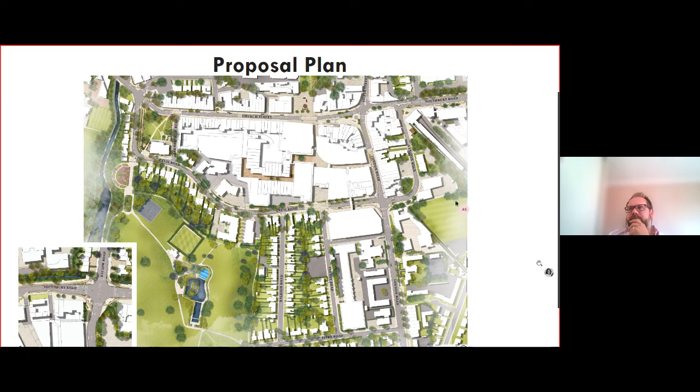Thanks, Alex. As Alex leads the journey throughout the town, I'll be talking through each of the key spaces in turn: Station Plaza, Library Green, a small pocket park off Church Street, the Market Square, and finally Fountain Island. But I'll talk about each of those in turn.

Okay, starting at the top right, we've got Enfield Town Station, and running westbound we're pedestrianising Coleman Parade. Currently there's a service road through here; we're making wider footways, introducing planting, and putting in a safe route for cycling. The businesses need to load, so we've introduced a loading bay in front of the bus stop, and some loading bays through the town centre will also support the evening economy. For example, this loading bay will allow 20 minutes of parking in the evenings, so people can pop to a takeaway and pick up a meal.

So there'll be dual purpose bays - loading during the day, and short-term parking in the evening. Moving over to St Andrews Road, access and egress will be blocked, so only emergency vehicles and cyclists can pass through this point, but it will still allow access into the new Riverloop car park.

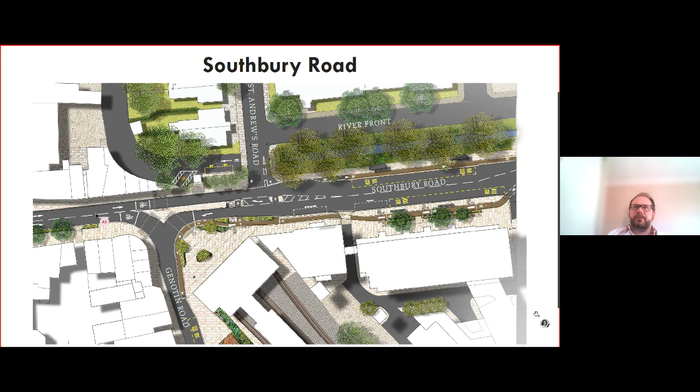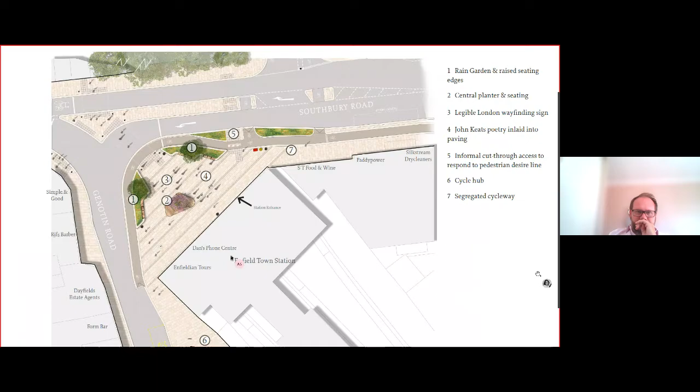Thanks, Alex. So the first key space is Enfield Station Plaza, and the idea is this becomes a welcome arrival and a celebration of Enfield's culture and heritage as the concept. Station Plaza will present a beautiful, welcoming, greener space, and make those walkable connections into the town and other locations really clear and legible.

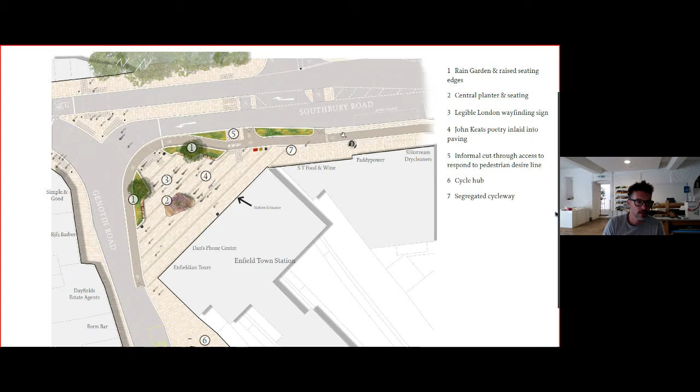Broadly speaking, the space is made up of a generous, high-quality paved plaza, surrounded by and protected by planting, and there's also that segregated cycle route to the perimeter that Alex mentioned, with very clear crossing points.

The space will be surrounded by planting, which will provide a sense of refuge from the surrounding roads and enhance comfort for people sitting, dwelling, or waiting for onward travel. The approach for planting throughout all spaces is not only to provide an attractive, regular character, but is driven by other important targets including improving air quality, supporting greater biodiversity, reducing flood risk, providing cooling, and being very maintainable.

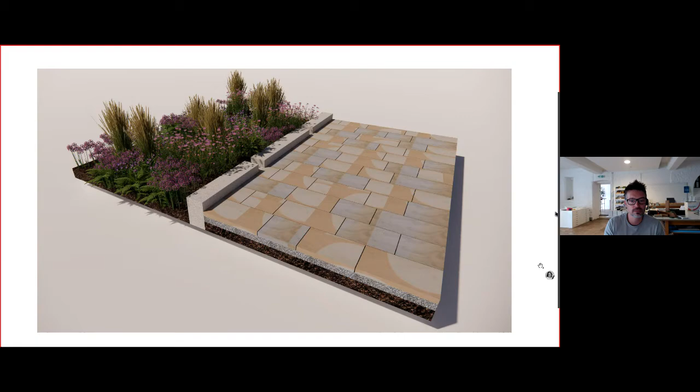That's quite important. The distinctive rain garden planting approach will reference Enfield's deep cultural and historic connection with water, but also fulfill a functional role in contributing to the drainage strategy - capturing surface water runoff from hard surfaces and the carriageway, rather than simply discharging that into sewers. The same planting strategy is employed elsewhere within the project area wherever possible - that's the standard approach we've gone with.

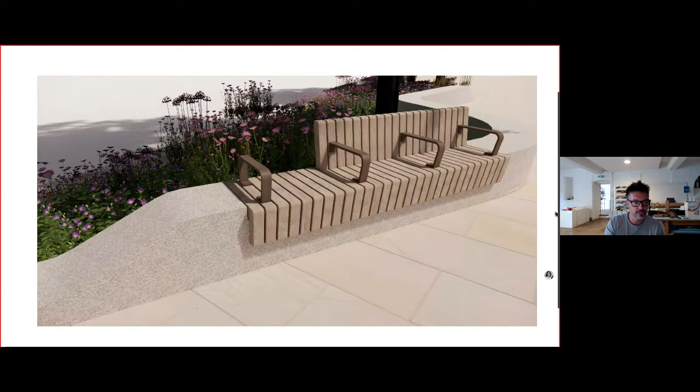Comfortable and accessible seating will also be integrated along those rain garden edges through a sculptural approach. Seating will be designed with accessibility and comfort in mind, but will also sensitively reduce some of the potential for antisocial behaviour.

Here you can see we've brought that green into the space with new rain garden planting to the edge, providing a sense of protection from the carriageway. It also relates to the green on the far side of the carriageway. There are lots of places for people to sit and dwell while waiting for onward travel, and clear crossing points and movement are shown clearly there.

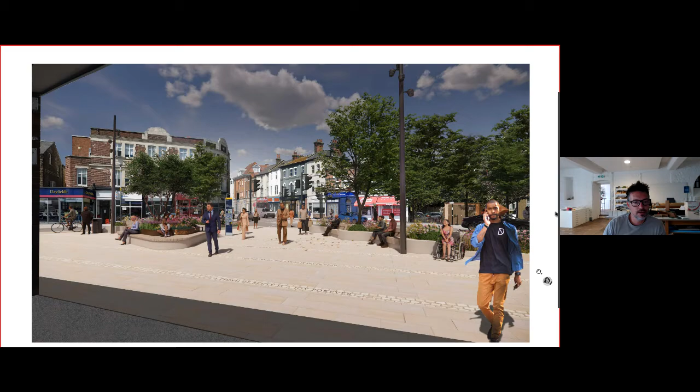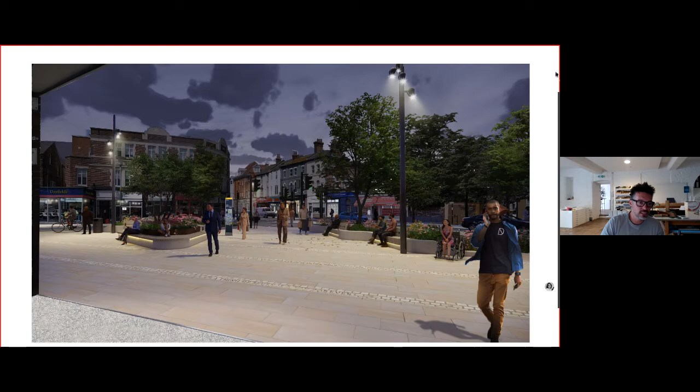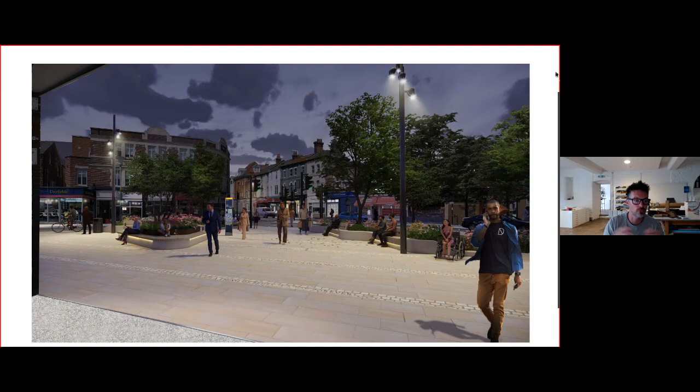Now a night view. I think this shows a very safe, secure and welcoming space after dark. Lighting has been developed alongside a lighting designer to ensure sufficient lux levels are achieved. Alongside this, the space is supported by CCTV and an emergency help point. CCTV and lighting have been considered for all subsequent spaces and public realm throughout the town centre.

There's also a complementary raised planter with a more generous lounging seat, which would have integrated art, and a multi-stem tree within the central part of the space. I think that could be it for Station Plaza.

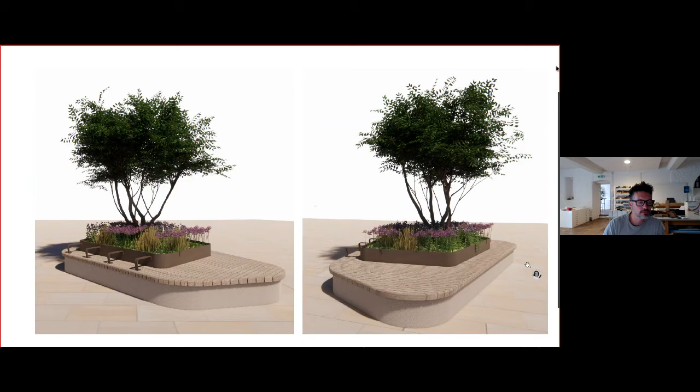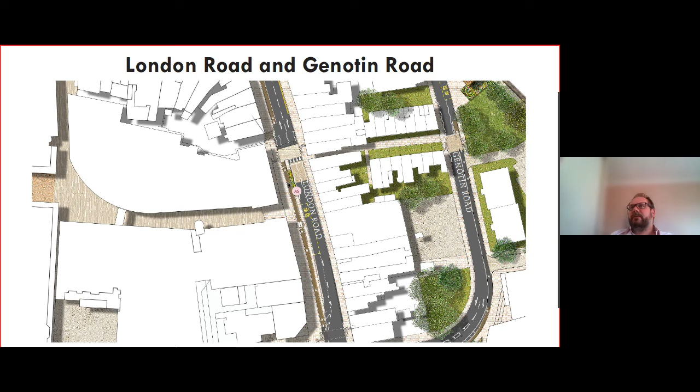So at the southeast corner of the town centre, we've got the junction of Genotin Road, Cecil Road and London Road. At the moment on this corner, we've got a sort of left turn slip road which traffic uses and comes around that corner slightly fast. So we're proposing to build that out, widen the footways, which enables us to have planting, and also continue that protected cycle facility westbound into Cecil Road, but also reduce the number of crossings for pedestrians through the junction. So we've got single crossings on all arms of the junction here.

In terms of the cycle movements through, we'll come onto it on Cecil Road. We did look at maintaining the cycle route from Green Lanes northbound along London Road, but the bus journey times in particular were quite an issue here. So we're routing them through the quiet ways via Sydney Road and Raleigh Road, which we'll come on to shortly. As you can see here, the cycle facility westbound continues along Cecil Road, and we've got a protected eastbound cycle facility as well.

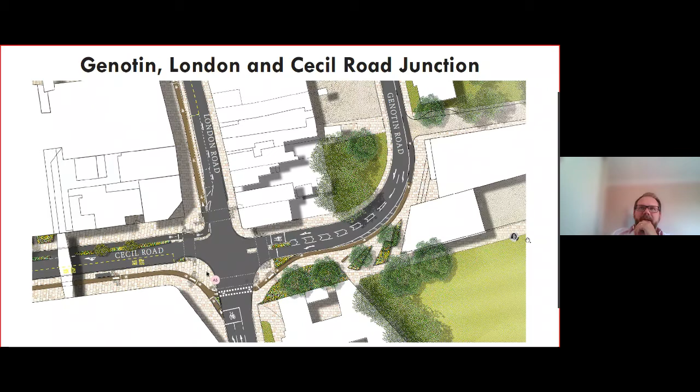Richard touched on the funding. Obviously, the aspiration is that we have planting along here as protection. It may be that as we get that incremental funding we have that as a sort of segregated kerb initially, but there will be some safe protection for cyclists. Thank you. Next slide, please.

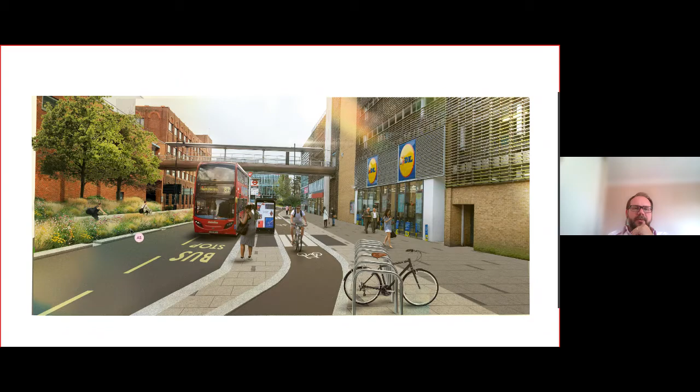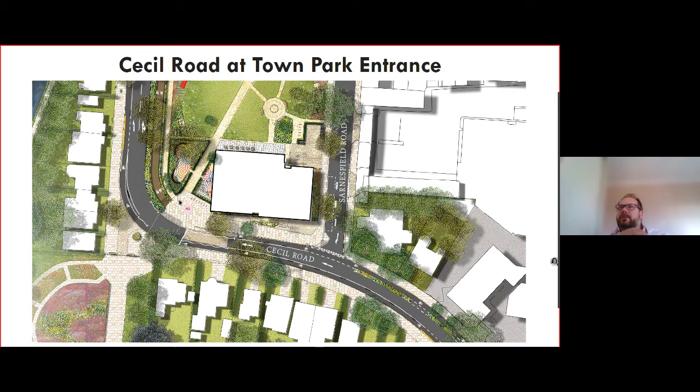Is that moving or not? Sorry, is that allowed? Sorry, yeah.

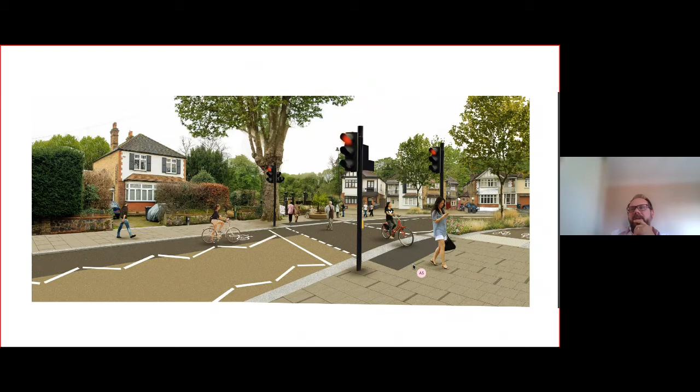Again, just showing you the area that's now opened up. So we've got the wide signalised crossing for pedestrians and cyclists, and then the cycle link on, and just a much clearer link between Town Park and Library Green. Thank you.

Thanks, Alex. I'll just talk through Library Green then. So the idea behind Library Green is the People's Garden. Next slide, please, Aga. I don't know if it's frozen or...

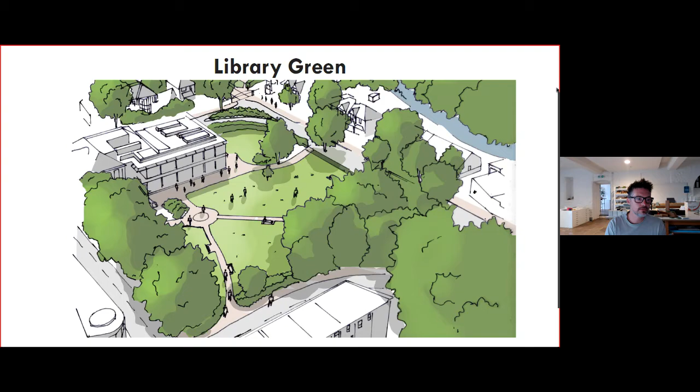Okay, and the idea behind is a green oasis in the heart of Enfield. I suppose to start with, a message we heard time and time again was that Library Green already works well. It's a popular space for residents, workers and visitors. So the proposals here are more about sensitive interventions, small tweaks and adjustments rather than wholesale changes, to make a good place great, I suppose.

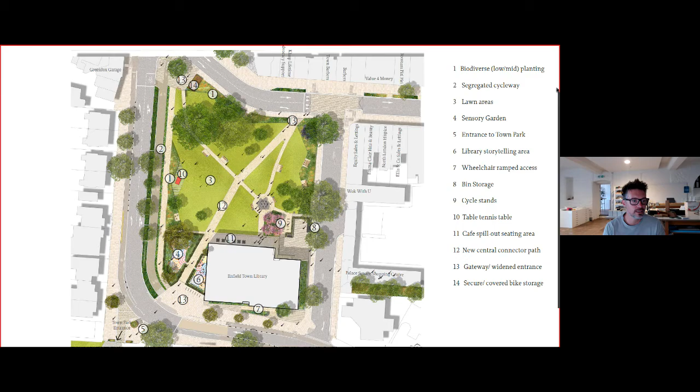The cherished lawns will be retained and protected as valued assets, as they are, while planting to the periphery will be redefined as a more biodiverse and colourful backdrop. At the same time, removing the hiding potential, making the space feel safer and less attractive to antisocial behaviour. It's a problem that cropped up a few times at the previous stage that people talked about. Next slide.

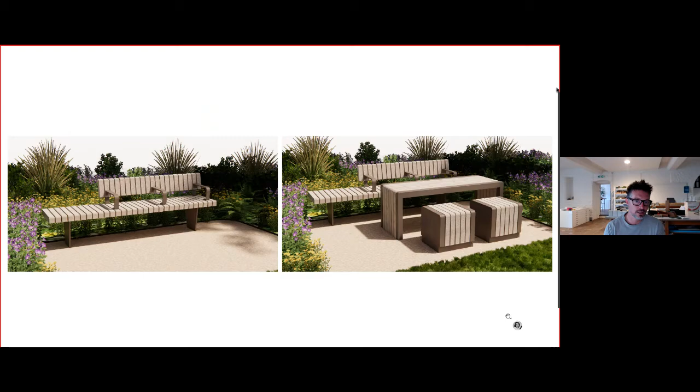Other proposals include, amongst other things, better seating provision, arranged for both social and more private or intimate configurations. Next slide.

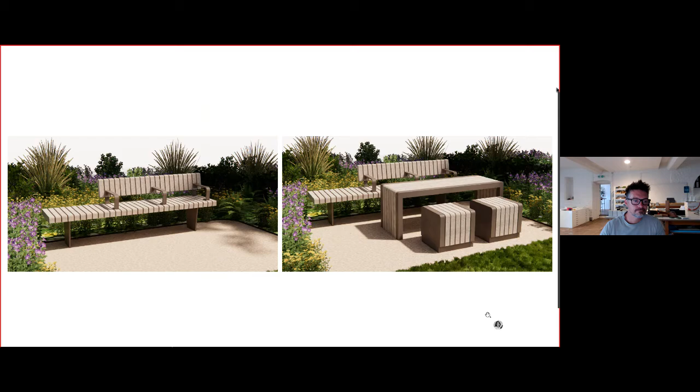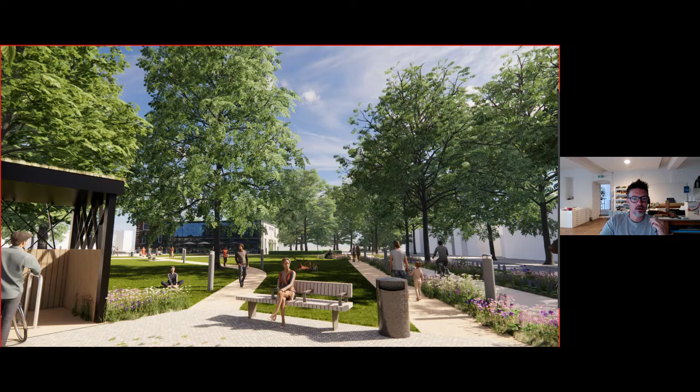The proposals restructure some of those footpath connections and links, and work to extend Library Green out to the carriageway edge of Cecil Road, by drawing a safe and usable cycle route and footway route inside the space, and it pushes the planted boundary up to the carriageway edge there. So that extends the space in a way. There'll be a series of gateway spaces which will improve legibility and raise the profile of the green, welcoming people in and also contributing to natural surveillance.

This gateway space to the northwest will also provide secure covered bicycle storage, mirroring the function already present near Enfield town station. There is bicycle parking throughout the town to promote active travel choices, but this provides the option to park on the edge of the centre and then complete the remainder of your journey on foot. It's just providing a lot of choice for people, I think. Next slide.

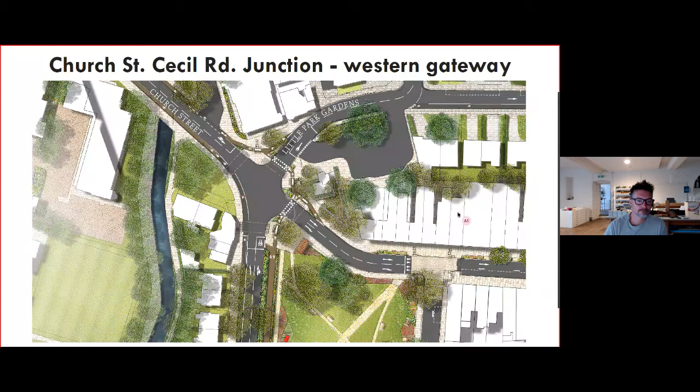Okay, and we're now looking at the northwest corner. So we've got the Little Park Gardens bus station here and the top of Library Green.

We've had a lot of feedback about this junction and Sarnesfield Road, about the poor pedestrian facilities here, particularly no connection between the bus station and Library Green. So what we're proposing here is to introduce signalised crossings on all arms of the junction.

In terms of cycle facilities, cyclists can continue up Church Street with protected cycle lanes, and then heading eastbound to connect into Library Green, there's protected cycle facilities across into the route through Library Green.

Slightly further east, we've got the junction of Sarnesfield Road, and again, a lot of comments through the consultation that it's very difficult to cross Sarnesfield Road with traffic coming quite fast around the corner, turning right towards the car park. So again, we're signalising this junction and putting pedestrian crossings on all arms, and we've also got a blue badge bay at the northern end of Sarnesfield Road.

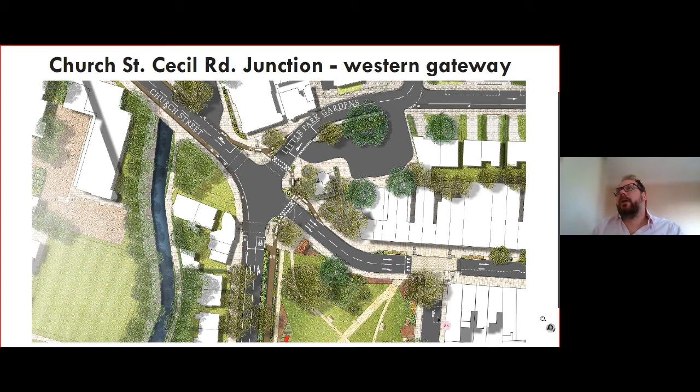So heading east along Church Street, at the moment there is parking along this section. Across the town centre, we've got over 1,000 parking bays.

So what we're proposing is to remove the parking bays from this location, introduce planting. Obviously, we've got businesses in the area, so we're maintaining loading on both sides of the road. Blue badge bays on both sides of the road, and also to accommodate a lot of the motorcycles that we're seeing in the town centre, we've introduced a motorcycle bay.

Tim will come on to talk in more detail about the space here, but just to say that the access to Little Park Gardens is going to be removed, but obviously from the junction with Cecil Road, you'll still be able to access Little Park Gardens to the north.

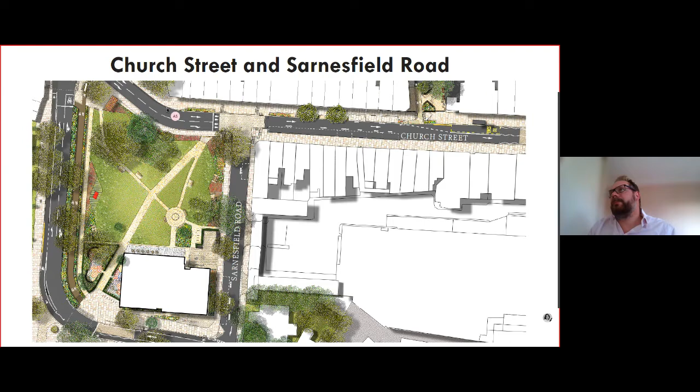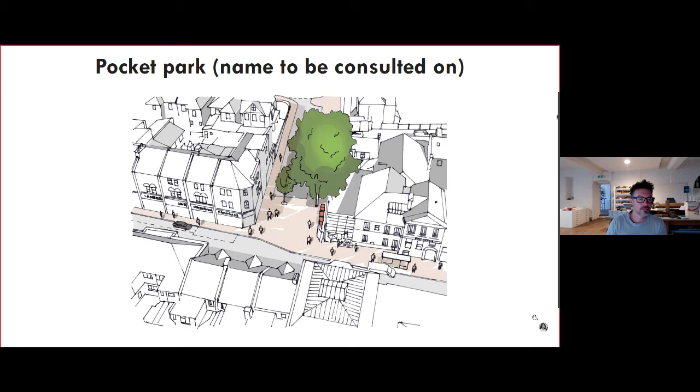Thanks, Alex. So their first space is the new Pocket Park, where Little Park Gardens meets Church Street. The name here is to be consulted on through this consultation period, so that'll be quite interesting to see what names people give for this space. The idea is to reimagine a hidden stream and provide a welcome interlude from the busy high street.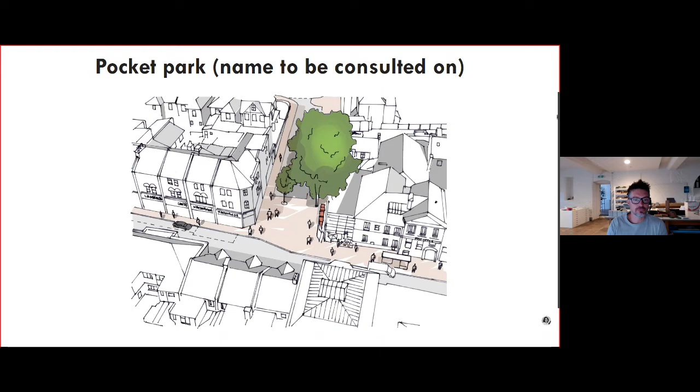Next slide. To reimagine a hidden stream, let me provide a little narrative behind that vision and the concept arrangement, which I'll share in a moment. Sadler's Mill Stream is intriguingly culverted four meters below the space, but it actually has a really good flow, and we've had the existing cover taken off, and it's audible if that's taken away.

The idea is to potentially have a new cover, potentially integrating informative artwork, which will be developed at the next technical design stage, to allow that to be heard and explain what's going on there. The stream also connects with an outflow at Town Park, and could be used through the interpretation as a subtle legibility tool and storytelling tool, to help connect those two places.

Yeah, that's enough. Next slide.

So here's the layout that's been developed. The new space is formed by removing that vehicular access from Church Street to Little Park Gardens. It allows the creation of a smaller incidental pocket park, we describe it as, which provides opportunities to pause and take a break from the business of the adjacent Church Street. I'll show a bit more of the detail in the views in a moment.

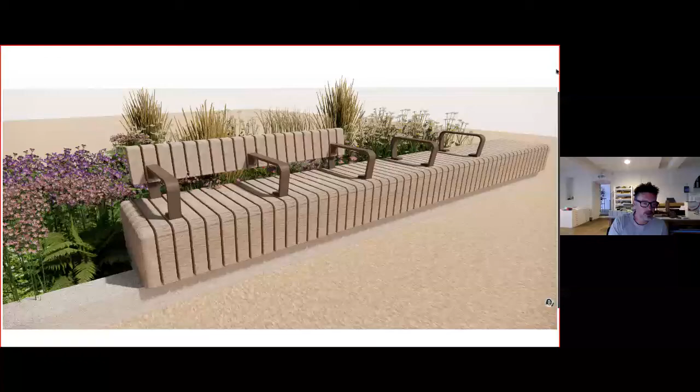And once again, as part of a coordinated approach, all the seating will also be coordinated with those edges. So we reduce the elements of clutter potential by having all these different things amalgamated together.

We'll also weave in the idea of public art into the fabric of the space. The idea is to have a drainage channel which runs through the space, and the water from that channel could help feed those wet areas, those rain garden areas.

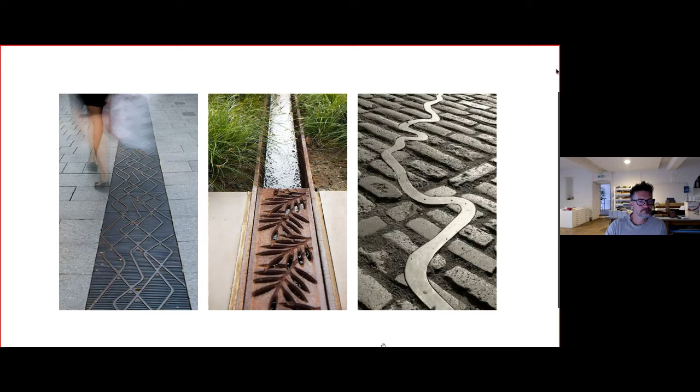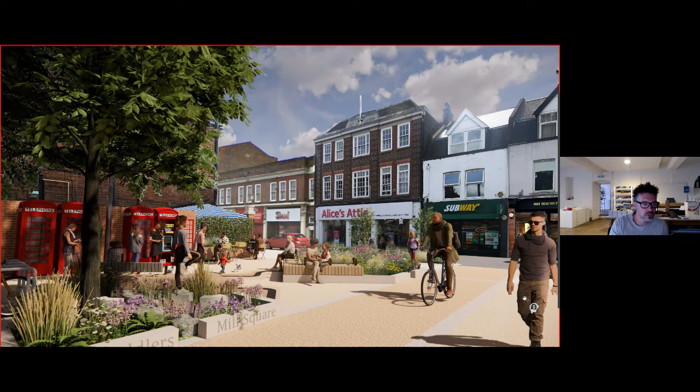So here we're closing off that access through. We're installing those rain gardens as discussed. There's potential for incidental play features to weave in throughout some of the rain garden areas - making it quite an intense area of different uses, but trying to arrange things so you're able to grab a little bit of privacy or intimacy, but also opportunities to spend time with a friend or meet someone here in the centre of the high street.

We also have a cycle access through here, delineated by a contrasting colour material as well.

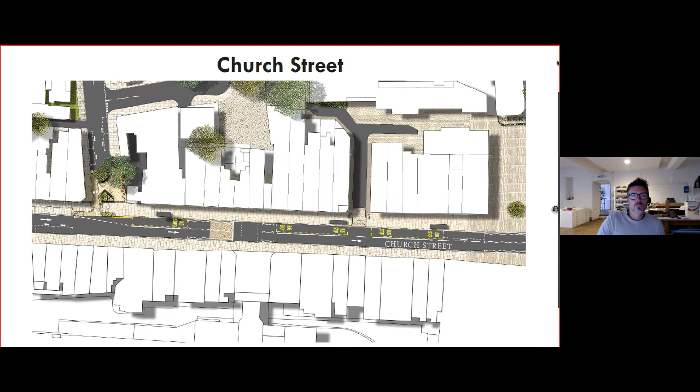Thanks, Tim. So, continuing along Church Street - just to stop at, oh, can we go back a slide? Sorry, can we go back one? Yeah, I think it's frozen. Mine. Sorry.

Thank you. So just north of the space that Tim was talking about, again, we've got additional blue badge bays. Heading further east, on Cecil Road, where we've removed the cycle parking, there was also a bus stand that TfL buses regularly use when there's issues. We're relocating that there and consolidating the bus stops here, so we've got the additional routes that were here on these two bus stops to improve the interaction with those buses, people getting on and off different buses. We've widened the crossing here.

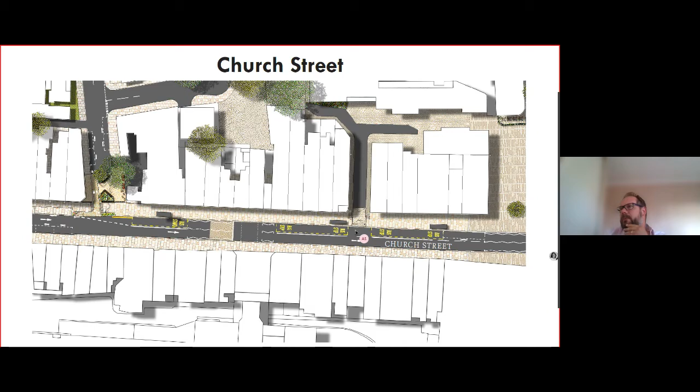Moving towards Market Square, we've got a loading bay on the north side here. The crossing - we really want to improve the connection between the shopping centre and Market Square, so what we're proposing is a wide, 20-metre crossing. It's very similar to one outside St Paul's Cathedral in central London, but it means that when the crossing's running, this whole space can be used by pedestrians to cross between the Market Square and the shopping centre. Further east, blue badge bays, loading bays, a taxi rank, and also a motorcycle bay.

And again, the loading bays on the south side, similar to what I mentioned at Colman Parade. So the loading bays here, and also at the western end of Church Street, in the evenings can be used for 20-minute parking - so people, if they're picking up a takeaway or dropping people off at a restaurant, those movements will be permitted in the evenings. The carriageway is narrowed here to two lanes, again allowing more planting on either side.

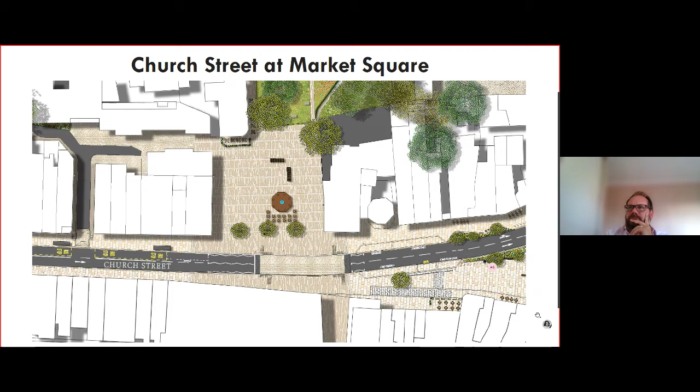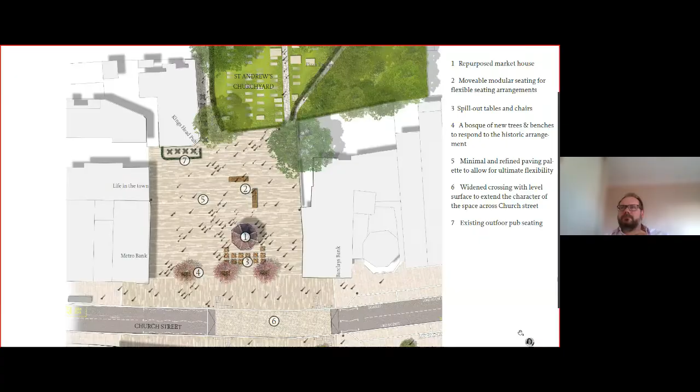So, the Market Square - one message we received loud and clear from the first round of engagement was that this really needs to be the beating heart of Enfield. So that's what we're trying to do here, revitalising the town's centrepiece.

We've also been working and consulting with the Old Enfield Charitable Trust as landowners to meet their needs for the space, as well as the town's more holistically. The Market Square will be Enfield Town's showpiece, and will re-establish itself as an active and vibrant destination for local residents, workers and visitors.

One key move is removing its car parking function to make it a more frequent destination and more flexible. The square will host a variety of events and appropriate performances, as well as its famous weekly market.

The idea is to have a very simple, recessive, but very high quality palette of materials to provide an enhanced setting for the surrounding fine architecture - some wonderful architectural gems around this space.

The idea is to have a very accessible flush surface to host those events, but also to allow people to easily move through and around. The high quality surface will extend across Church Street to the facade with Pearsons of Enfield, extending that space.

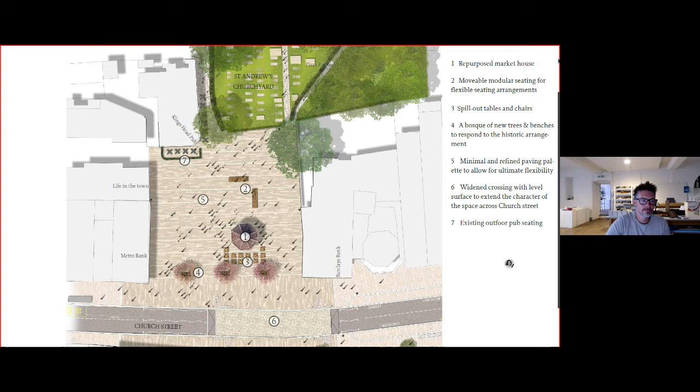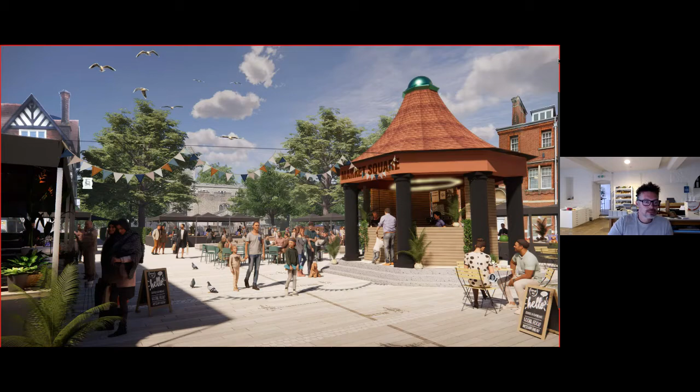Here we're stepping back towards Church Street a little, looking into the space. A single surface designed from building edge to building edge will redefine the space as very much a people-focused place. The market house, retained in place here, will be repurposed as a new cafe kiosk.

The idea is to have a complementary but quite contemporary independent internal structure inserted within the original structure to respect that architectural heritage, so we're not impacting on the market house building at all. This aims to further activate the square with alfresco dining opportunities, which can also help with the evening economy. Next slide, I think that's probably enough for that one.

There'll be improved lighting infrastructure to support events, with pop-up power units - the festoon lights you can see there will be turned on and powered by pop-up power. The lighting itself currently comes from the building edges, and that's where it will remain, but we're improving that lighting so we don't have any clutter or light columns within the space. This keeps it very flexible. Next slide.

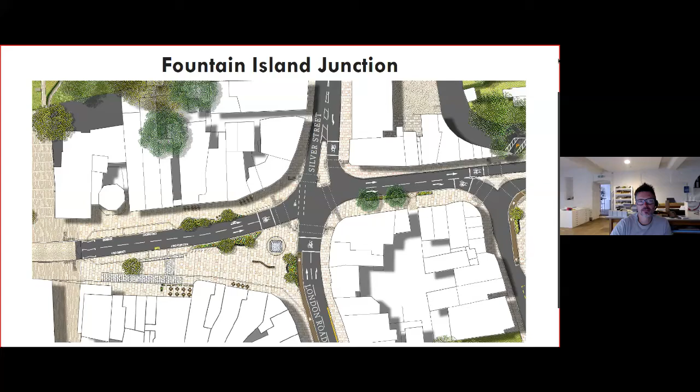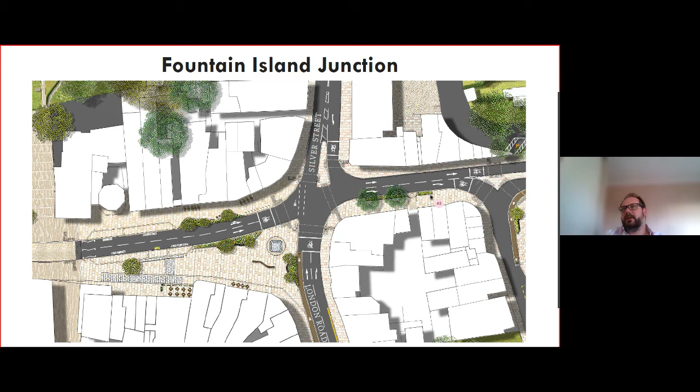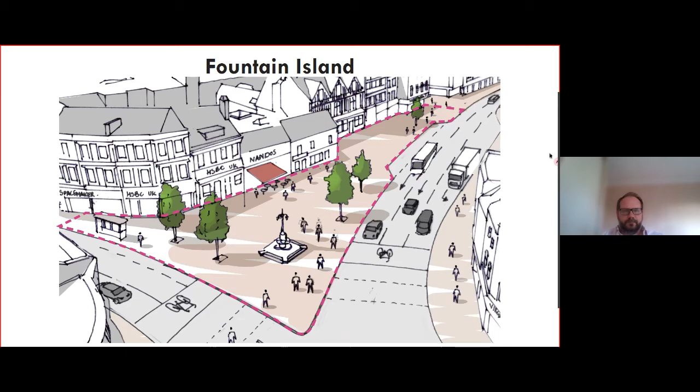So, Fountain Island. Whereas at Library Green we had the People's Garden, here Fountain Island becomes the People's Plaza, with the idea of having a social place for the community.

This is a very flexible space, allowing for celebration, gatherings and modest scale events and performances. The space will be adaptable and programmable to meet the needs of a town-wide event calendar. We've tested a lot of different configurations of things that would happen within the space to make sure it can function correctly.

Fountain Island will supply opportunities for al fresco dining, where visitors can enjoy a bite to eat and a drink with friends while sat in that joyous setting, surrounded by fabulous architectural gems.

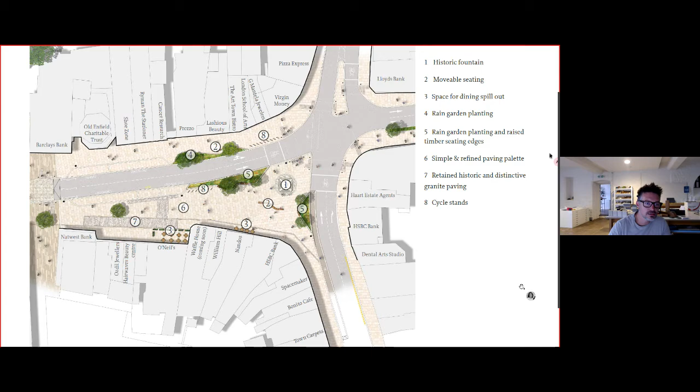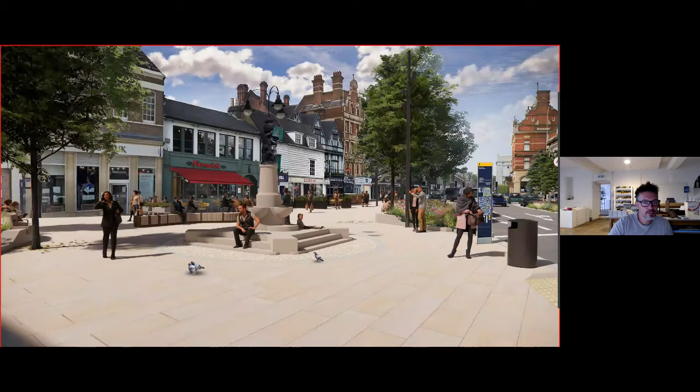So the proposal seeks to once again include beautiful, biodiverse, climate resilient planting to the perimeter, which provides a sense of refuge from the surrounding vehicular spaces, while performing an important rainwater capturing function.

Public seating will be arranged in comfortable, safe and inviting arrangements, providing both social opportunities and, by contrast, more intimate and private moments.

The drinking fountain is given an improved setting, through the paving detail that surrounds it and through the arrangement of the space, providing focus on the fountain feature. We also provide the opportunity to maximize functionality and flexibility through the inclusion of movable seating, seen in the middle distance behind the fountain. It's shown here in an everyday mode, but the idea is that it can be fragmented and broken up and redistributed. I'll talk about that a little more in a second.

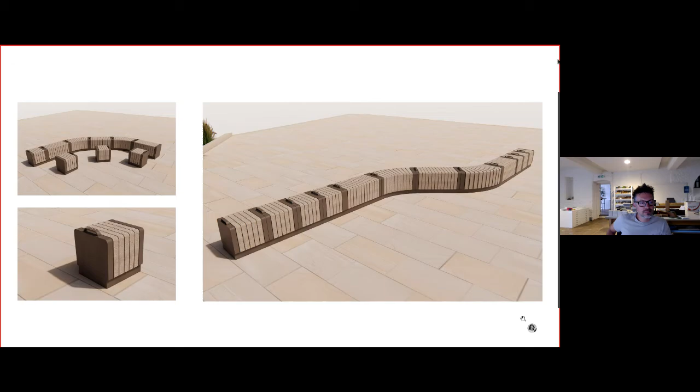At the moment, if you're heading in a diagonal direction across the junction, you need to cross 7 different pedestrian crossings. So the plan is to tighten up the junction, have direct crossings on all arms, widen the footways on the edges to allow for planting, and also provide protected cycle facilities for all movements through the junction.

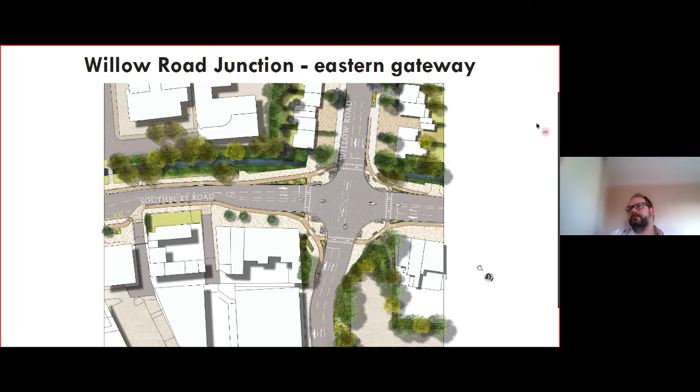Thank you. So that completes our run through. As Richard mentioned, if you've got any comments or questions, please drop them in the chat and we'll endeavour to answer those and come back to them.

Just to touch on the data collection and analysis - an awful lot of information and surveys have been collected. Importantly, this was pre-COVID when the data collection took place. We collected traffic volumes by vehicle type, speeds, bus journey times, parking and loading data that also picks up how many blue badges are being used across the town centre, signal data, collision data. A lot of that information went into traffic models so we can get a detailed understanding of journey times, delays, and queues in the current situation, and then model the proposed situation to understand the impacts.

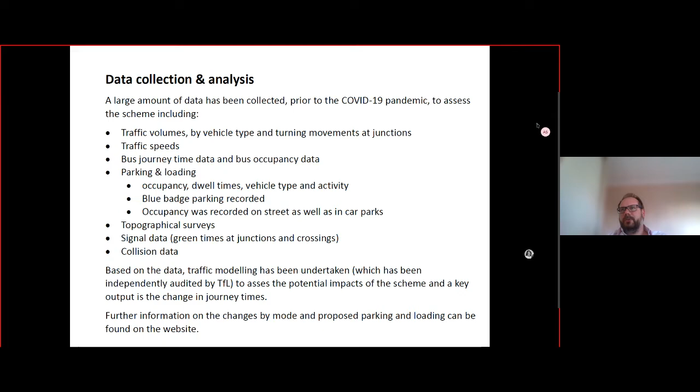In terms of journey times, with the introduction of additional pedestrian and cycle facilities through the town, we're looking at a 7 to 13% reduction in motor traffic compared to 2019 levels. Some of that will reassign onto local roads in the short term, but a lot of it will move in different ways.

With COVID, we've seen people change their travel patterns, working from home more regularly. With similar schemes, we see people travel at different times of day - if they don't have to be on the road in the morning peak, they'll choose to travel at other times. People will link their trips, combining shopping and work journeys rather than making separate trips, reducing the overall number of vehicles. With improvements to walking and cycling in the area, we're hoping there will be an element of mode shift, with people on longer routes picking more strategic routes, for example the A10 and the A406.

But we do accept, particularly in the short term, there may be some reassignment onto local roads. So there'll be a detailed monitoring strategy as part of this - once implemented, we'll keep reviewing that local area to understand if there are any issues and mitigate those where we need to.

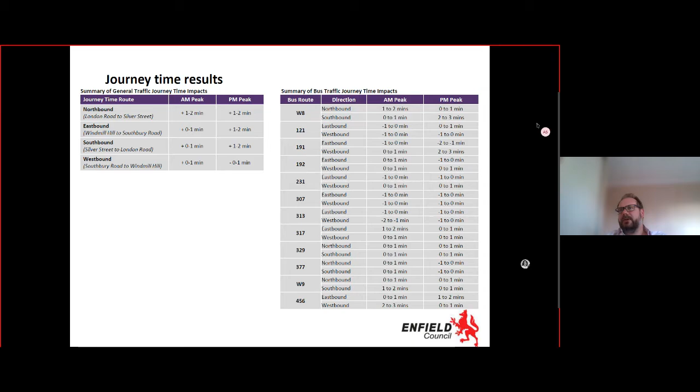For bus journey times, we spent a lot of time working with TfL buses, and we're seeing some increases and some decreases. We're looking to work with TfL buses to mitigate those journey times and get an improvement on the predicted journey times, which TfL buses are supportive of.

Thank you, Aga. This gives a quick summary - the blobs on the plan show where we're proposing new pedestrian improvements, and we've got the cycle links through the town centre, showing how we're connecting into existing and proposed routes on the wider network. We've got the C20 heading down the A105, with an aspiration for the cycle network to head east towards Ponders End, and west up Windmill Hill towards Cockfosters. Thank you.

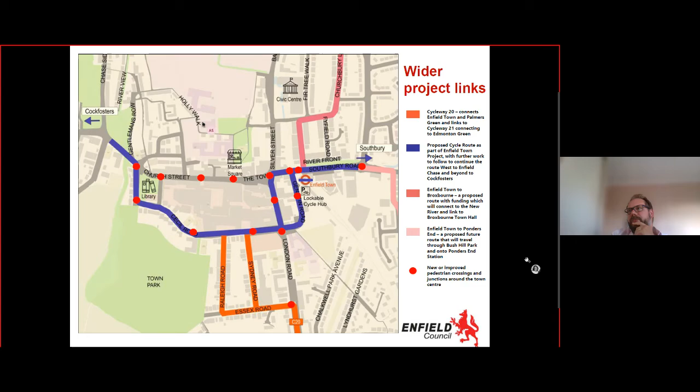So there are a number of ways that you can get involved and share your views on this project, as well as opportunities to come and talk to us at various events that we're holding across the town centre.

We have a short survey that's open until the 25th of September. This is asking a few different things: firstly, how you think the proposed plan responds to the Enfield Town design principles, your suggestions and ideas for the sensory garden proposed in the library green, as well as the opportunity to suggest a name for the new public space at the junction of Church Street and Little Park Gardens.

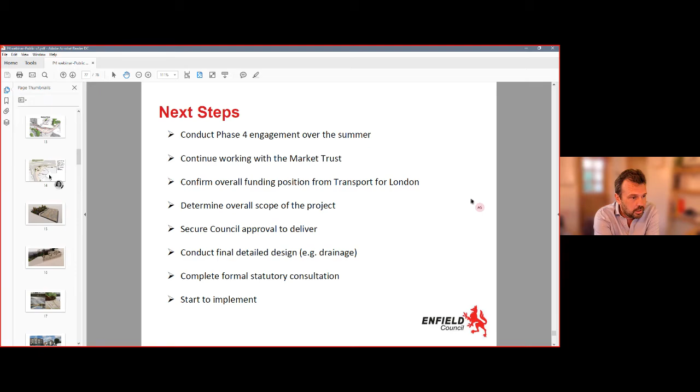One question about the bit outside the front of the station, and whether we'd managed to widen that pinch point that exists as you go around down to Genotin Road. So we have managed to widen that a little bit. We've obviously got the constraints of still enabling the buses to move around there, but that has seen some widening.

We've had a question about disabled bays, so I'll pass this to Alex. Questions around the number and location, you might not be able to give complete detail on location, but could you give a quick overview of disabled bays, Alex? Sure. We recognise that with the cycle facilities coming in, there's a lot of single yellow line disappearing that Blue Badge users are able to use. At the moment, in terms of formal Blue Badge bays, there's one. We're increasing that to 16, so we've got Colman Parade, Church Street, Sarnesfield Road, London Road, spread across the town centre. As I mentioned at the end of the presentation, the data analysis collected looked at Blue Badge usage across the town centre, and we believe the 16 bays spread across the town centre accommodates that usage.

Okay, that's great, thanks Alex. Moving on, we've got a question around how this work relates to the Palace Exchange and the shopping centre development there. I wanted to clarify that this is a council-led project versus that which is the private developer's. They brought forward some plans last year, and at the moment they're not taking those forward, and the council are waiting for further discussions about what those plans might look like. What's important to say is that we've developed these plans further now, and are in a better place to help work with the developers on what the public realm needs to look like, and to help explain the design principles we've come up with for them to also consider.

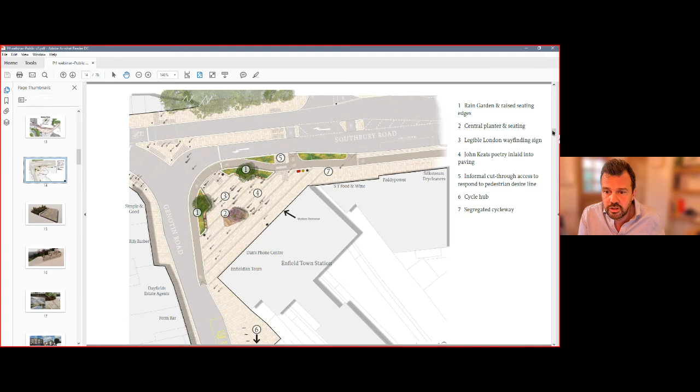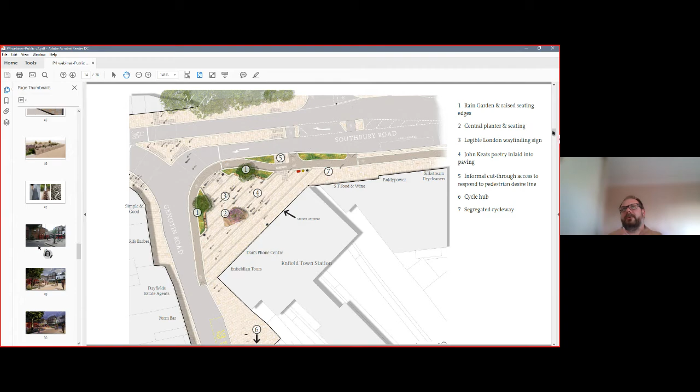Next question is about the raised table crossing across the Market Square, one for Alex please. People are asking about the materials, and whether that's significant or strong enough to take the weight of the traffic. Sure. There's been a lot of lessons learned from previous schemes, and the evolution in materials used is constantly being developed, and it also comes down to the quality of the foundation. Recognising this is a busy route with a lot of buses and HGVs, we'll ensure the materials and in particular the foundations are appropriate, so it doesn't become uneven or need replacing in a short period of time. Okay, that's great, thank you.

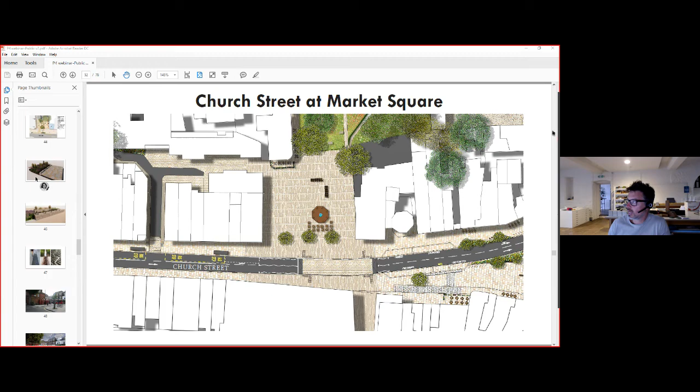Yes, indeed. I haven't got the exact figure to hand, but we've had a below ground utility survey completed, and we've been throughout the town centre exploring opportunities to plant additional trees wherever constraints allow. As Richard said at the start of the slide deck, we talked about funding, so holding to a number throughout the whole town centre, I'm not sure I can give that, but project by project, we certainly are increasing the number of trees throughout.

Does that answer the question? Yep, I think that's great, and I think there was some comment on some trees that have perhaps been removed in the past on Cecil Road.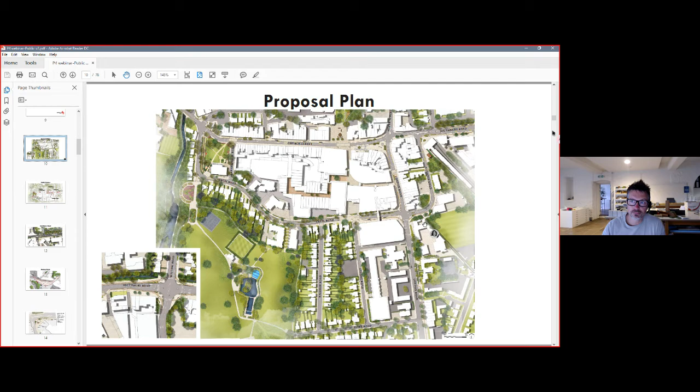You won't know about that, Tim, but I can cover that. The council has a very passionate and committed tree team. Occasionally trees do have to be removed, and typically where that happens they should be getting replaced as a matter of routine. So if you feel there's a place where a tree hasn't been replaced, do report that through to the council, and that can be looked at. But overall, we hope to see an overall increase in trees as part of this project.

That links, I think, to maintenance. I'll address that. So a number of questions around maintaining these spaces. These schemes are being discussed in consultation with internal teams at the council who will be responsible for maintaining them, and a lot of thought will be going into the planting. There've been some comments about the current maintenance on some of the spaces, and there'll be lots of thought going into the design of the planting areas in such a way that can reduce the maintenance burden, but resources do have to be allocated to that, and that's part and parcel of the rain garden approach we've been discussing, which also helps with that.

Okay, I'm just looking through. Aga, could you just talk a little bit more about the timetable and next steps, in big picture terms?

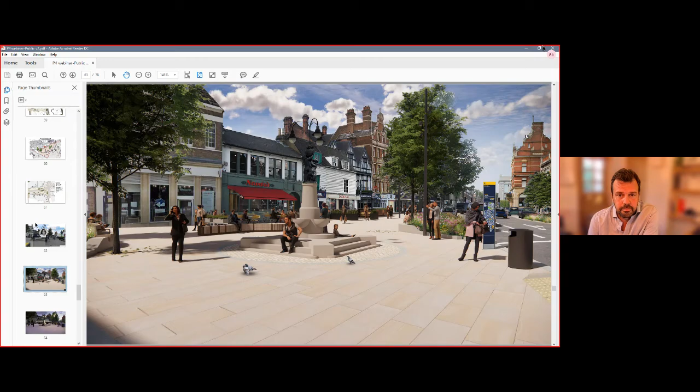Alex, would you just explain a little bit about, because I think we are reducing on-street parking, but there is obviously the car parks still remain. Could you just elaborate on that a little more?

Yeah, sure, absolutely. So we are removing the formal on-street parking bays, notably the section at the western end of Church Street here. But across the town centre, we've got over 1,100 parking bays within the car parks, the multi-storey car parks, but also the surface level ones. We've got New River Loop, Little Park Gardens, Sydney, Church Street. Some of those do close early, so what we'll be looking to do, again to support that evening economy, is have those open for longer so that they're more accessible, particularly in the evenings.

So we think getting that balance between allowing loading, allowing blue badge bays, and on the south side of Church Street in the evenings will allow short-term parking at loading bays at the western end, the eastern end, and Coleman Parade. So if you're picking up a takeaway or something like that, or dropping someone who can't walk too far to a restaurant, that can take place before moving on to one of the car parks.

Okay, thanks Alex. Another question for you around loading by Coleman Parade. I think there's some suggestion of public realm and pedestrian improvements there, but can you touch on the loading, and we might be able to bring that slide up as well.

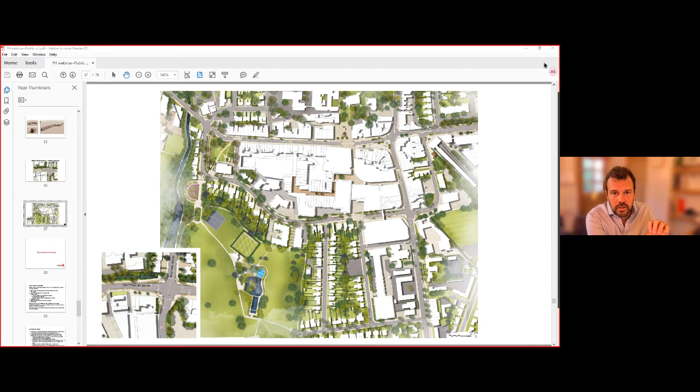We've got some more questions about funding and total cost of the project. The proposals we're looking at here are in the region of £15 million to deliver the full scope of what we might want to do. That's obviously a significant amount of money, and as we all know, there are inflationary pressures at the moment, so the cost of works will increase over time.

The Transport for London money is really key to bring forward some of the transport improvements we're suggesting. But as I've mentioned previously, we do have £5 million available that will enable us to take forward a series of improvements, potentially focusing on some of the public realm areas. Exactly what priority that will take is work that's ongoing, and I hope by the autumn we've got more clarity on the TfL funding position, and then we can discuss with elected members and other key stakeholders what that sequence of delivery might be, with some elements delivered in the years to come.

We think it's sensible and appropriate to come up with a proposed plan that's comprehensive in terms of its look at the town centre, even if it can't all be implemented in one big bang. We'll then have a plan that we can make sure is delivered incrementally. I know that's not a completely specific answer, because frankly we don't know the level of funding that's going to be available at this time, but hopefully that explains the approach we're taking.

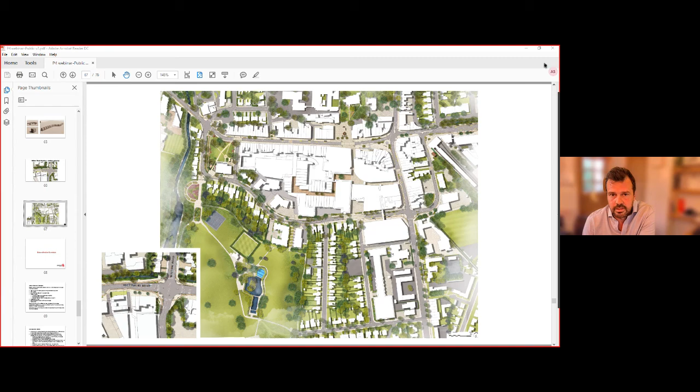We've got a question around art and heritage and things such as that. Maybe I'll pass to Tim initially, Aga may want to contribute, but do we have plans for things like that?

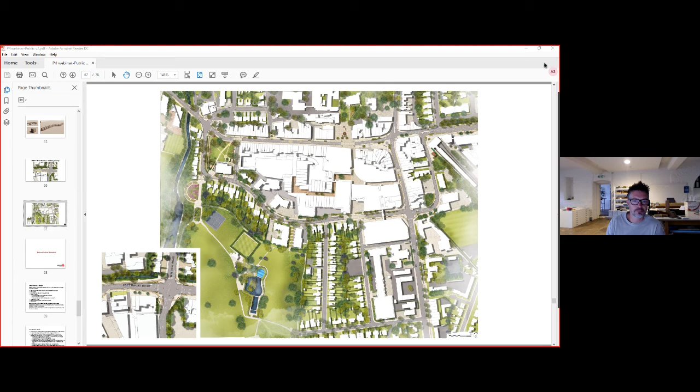Yeah, sure. So the intention is that we will have a steer on the artwork. We'll effectively provide an art brief, which can then go out to commission artists to put their interpretation on that approach. What we have identified is that each space throughout the town centre has got something quite unique about it, some quite interesting stories and narratives behind them. So we've suggested what those different art elements could be, but with a wider, more coordinated picture for the whole town, all spaces.

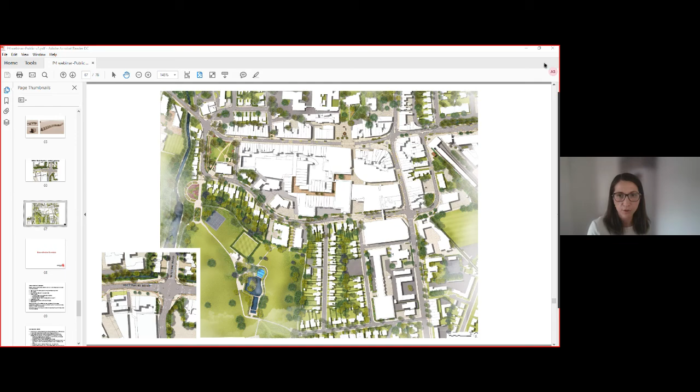Yeah, just to add, we have mentioned, I think on one of the boards—perhaps this is where the question is coming from—that artists will be commissioned to look at that specifically. At the moment design does incorporate different art pieces, but we'll be looking at this separately with the relevant team within the council to ensure the process is robust and done as one piece rather than piecemeal, because that's the nature of the work of artists. So once we have the scope completed, that's the stage when we'll be looking at sourcing the artists. I don't want to say too much more about the commission process itself, but this is the point where we'll be looking at that piece of work to make sure it's one cohesive and holistic approach.

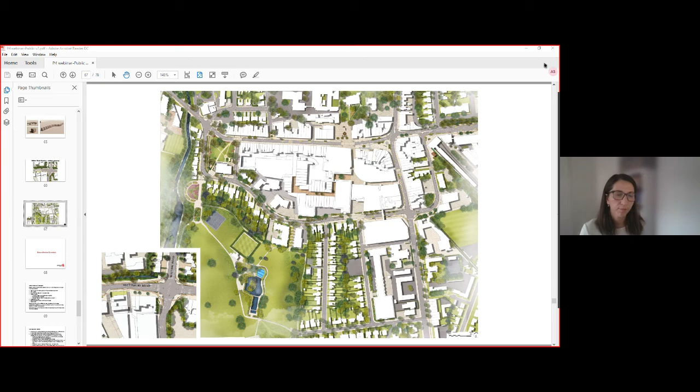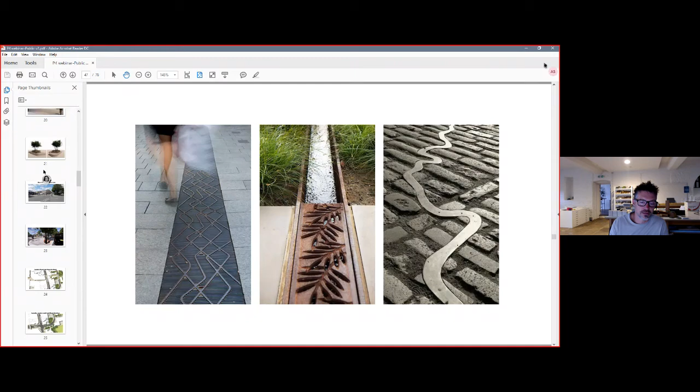I'd add on top of that, what you're seeing here is quite a small snapshot of quite a long journey we've been on. We've got some in-depth analysis and research into each of these spaces, and there are some quite interesting stories—for example, the Sadler's Mill stream, which goes under that new pocket park. There's also the fact that John Keats School, Clarke's Academy, was within the context of Station Plaza. And we're on the edge of those old royal hunting grounds as well, with the Library Green. So there's an awful lot of interesting stories that can be told throughout each of these spaces, and the idea is to have a lot of that integrated within the fabric of the place, so it feels really cohesive and coordinated.

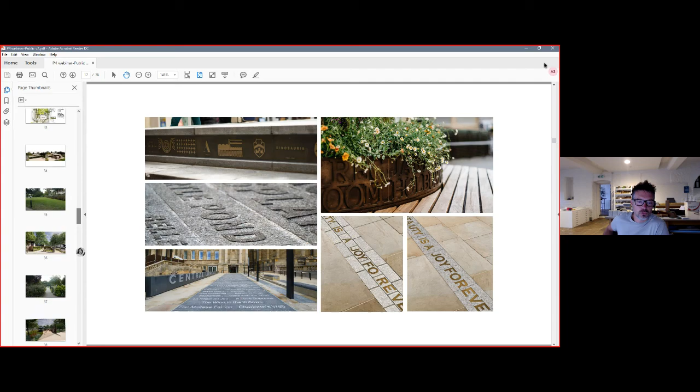Yeah, that's great. That's very helpful. Yeah, thank you.

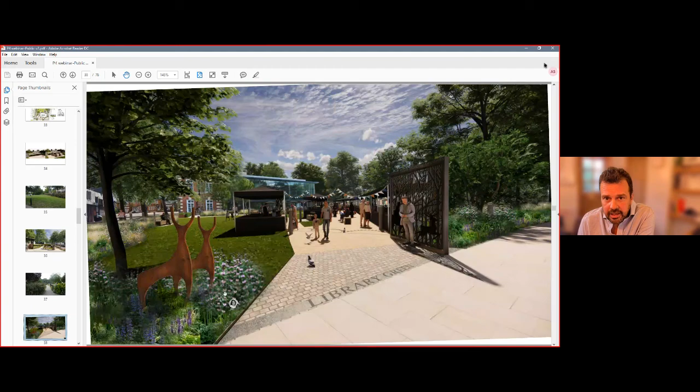Okay, some questions for Alex. We've got a question about Raleigh Road and traffic flow. Are we proposing any changes, and how that might impact people? I think we've shown that as people potentially cycling that route. Also linked to that, you can perhaps cover access to Little Park Gardens and the car park down there, the grammar school, and just a brief summary of how that might work, just to clarify that that's being considered.

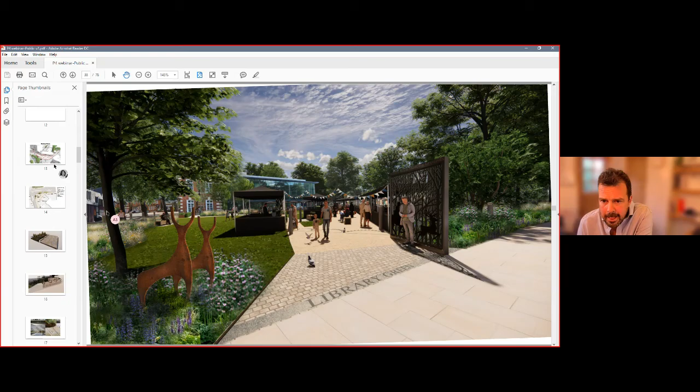Sure. So touching on Raleigh Road first - it will stay one-way southbound as it is at the moment, but the traffic flows there are very light. So there's capacity to make it one-way southbound, but allow cyclists only northbound. So the traffic movement would stay as is, but cyclists would be permitted to travel northbound on Raleigh Road.

In terms of the link north to Little Park Gardens car park and the school, so the junction here outside the station, you can come in and out of Little Park Gardens here. We are changing the movement slightly, so this section would be eastbound only for general traffic. Currently it's westbound, and then we allow a westbound facility for cyclists coming in the opposite direction. So a strong cycle connection to the school for pupils, but also the ability to continue accessing the Little Park Gardens car park to the north.

So that does mean a slight adjustment in the parking along here - we are losing a couple of residential bays along here. Again, further details on the impact of parking at each location are available on the website. There's a transport technical summary there that provides the detail of the changes in parking at each section of the plan.

Okay, that's great. Thanks, Alex. A couple of questions about the library - will the opening hours be extended, and the accessibility of the toilets. So that's a good question. I don't think we know the answer to that one, so that's something we can take away and look at. Also a quite detailed question about cycle routing that I think if you could email into us at healthystreets@enfield.gov.uk - otherwise that might be quite complicated or take a little too much time, and we've only got a matter of minutes left.

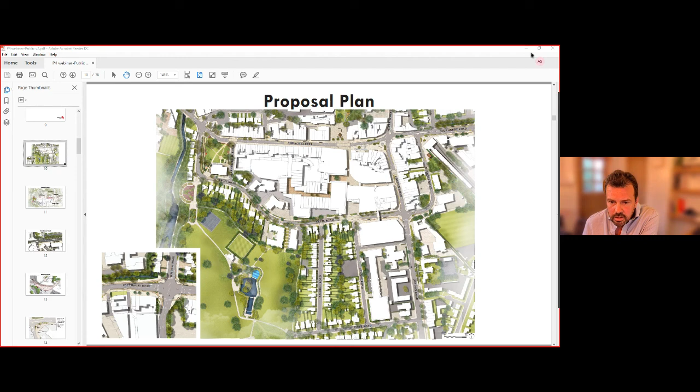As part of that survey, we're running a competition where we're asking for submissions of ideas for the name for the new public space. We're in the town centre on a number of occasions for various pop-ups and drop-in sessions. We're at the Library Green on the 9th of August and the 10th of September, and we also have an upcoming pop-up on the Market Square on the 9th of September.

This webinar is going to be uploaded onto the project page if anyone needs to watch that later, and for people who weren't able to attend tonight. Finally, we have the exhibition running at the Enfield Town Library until the 25th of September, and that is a series of information boards as well as the proposed plan that you've seen tonight, and some of the proposed designs for the public spaces, and that's there until the end of the engagement period as well.